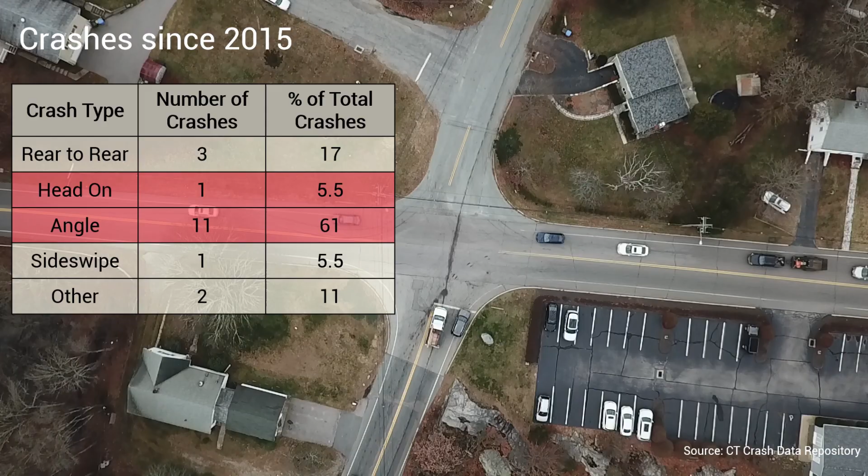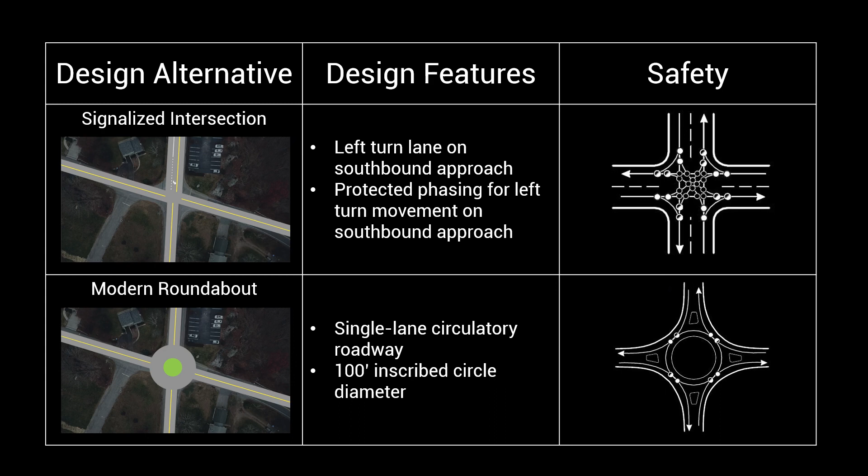Two design alternatives were considered for this intersection: a signalized intersection with a protected left turn on the southbound approach of New London Turnpike, and a single-lane modern roundabout. Roundabouts are categorically safer than traditional four-legged intersections because they entirely eliminate potential conflict points for crossing collisions.

The traffic operational performance of the design alternatives was evaluated using VISSIM models and the Highway Capacity Manual. The results indicate that at peak demand, signalization would maintain a similar level of service as the existing two-way stop control, while a roundabout would result in level of service A.

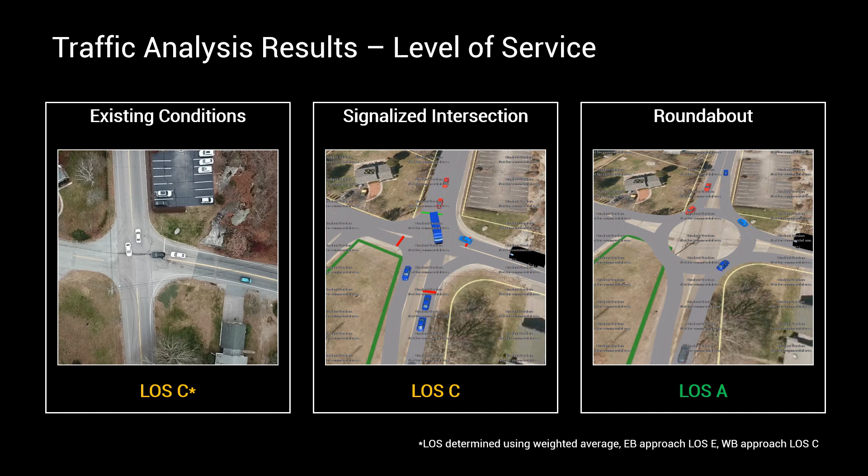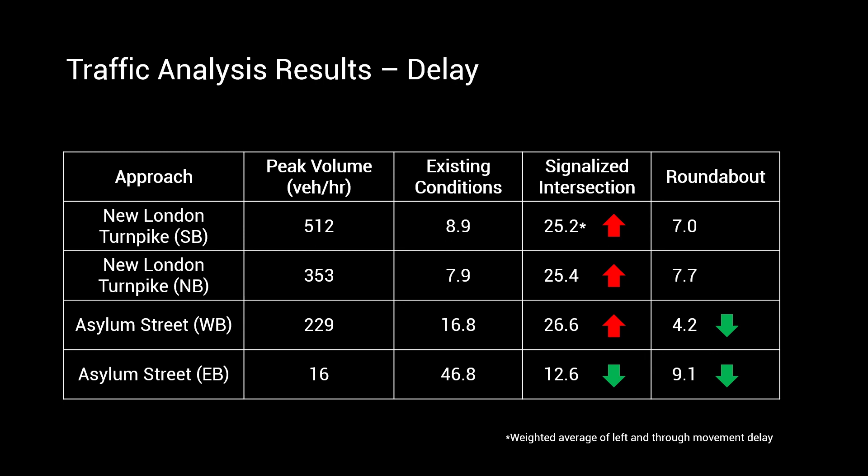As level of service only provides a broad overview of performance, delay at each approach was analyzed further to better understand these results. Despite signalization maintaining a level of service C, implementation would substantially increase delay times on the three major volume approaches to the intersection in favor of reducing delay on the eastbound approach of Asylum Street. In contrast, the implementation of the roundabout would result in very low delay times on all approaches. Due to the favorable safety characteristics and traffic performance, the modern roundabout was chosen as the primary design alternative.

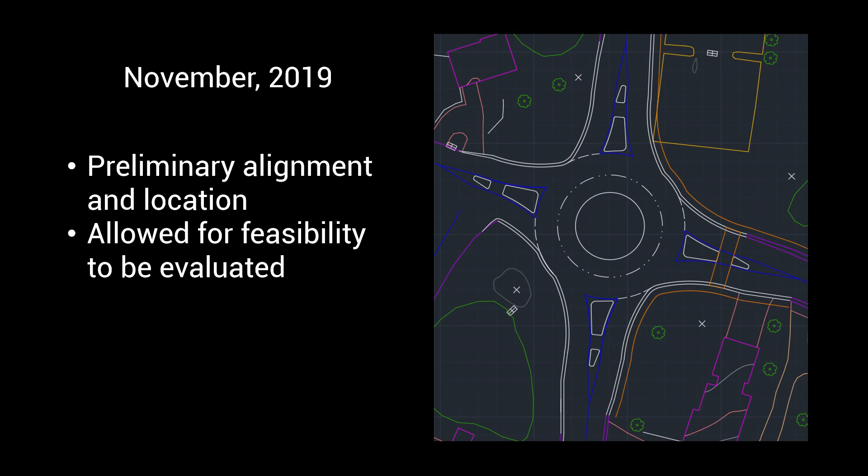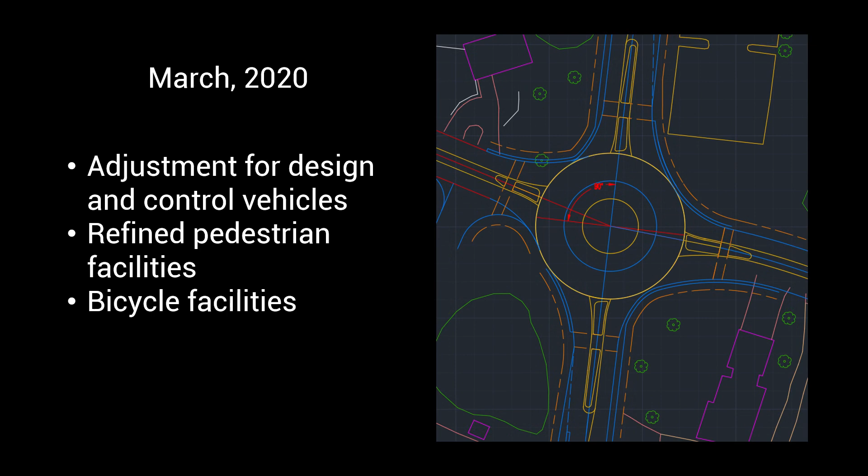The design process was iterative and was done in accordance with the Federal Highway Administration's design guidance. This process allowed for encroachment onto private property to be minimized while allocating sufficient space for vulnerable user facilities. These efforts resulted in the following design. The roundabout design features an inscribed circle diameter of 100 feet as it fits well within the existing right-of-way and is sufficiently large to accommodate typical traffic demand.

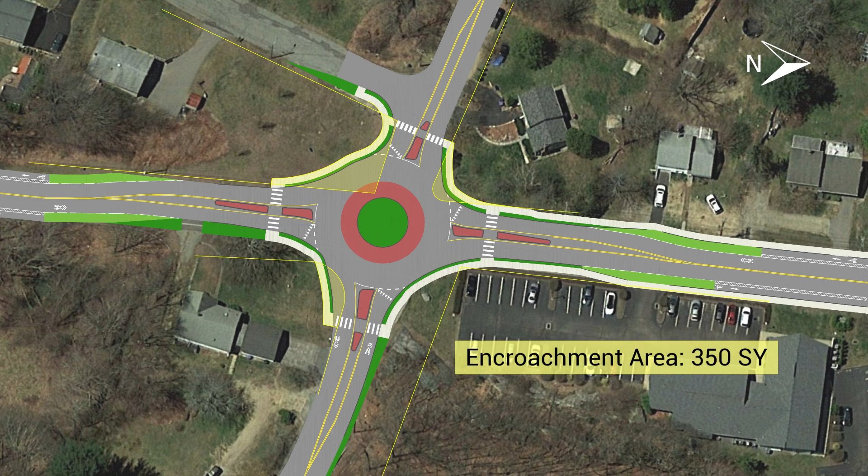Splitter islands with 6-foot wide refuge areas at crossings were provided at each approach of the intersection. In order to ensure adequate visibility and channelization without impeding access to nearby driveways, effective island length was increased with a painted envelope. The implementation of these features results in a total encroachment of 350 square yards on private property.

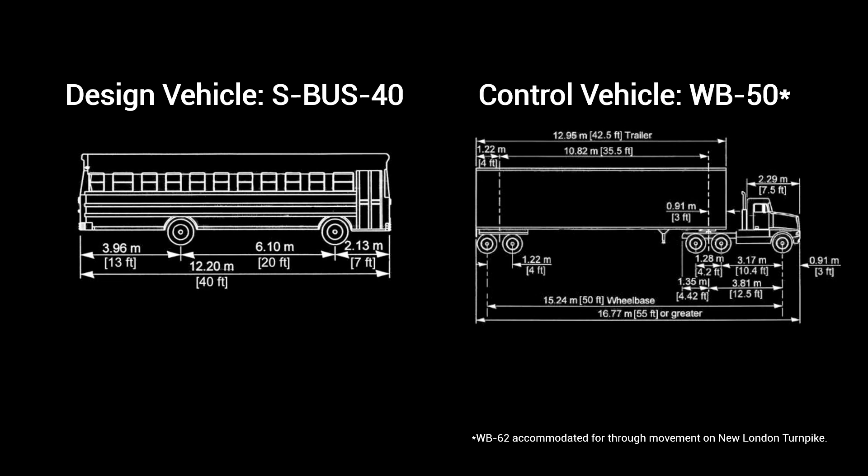A school bus was selected as the design vehicle, as it is the largest vehicle expected to make all movements at the intersection with regularity. Consequently, vehicles of lesser or equal size are able to make all movements at the intersection without using the truck apron. The major volume approaches were designed to accommodate larger vehicles as well. The WB50 truck was used as a control vehicle for all turning movements. Additionally, as New London Turnpike is a minor arterial, the WB62 truck was used as a control vehicle for north and southbound through movements.

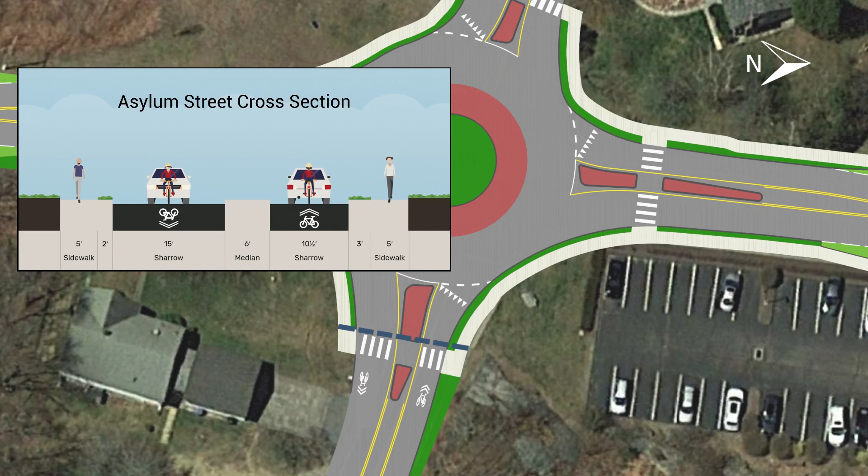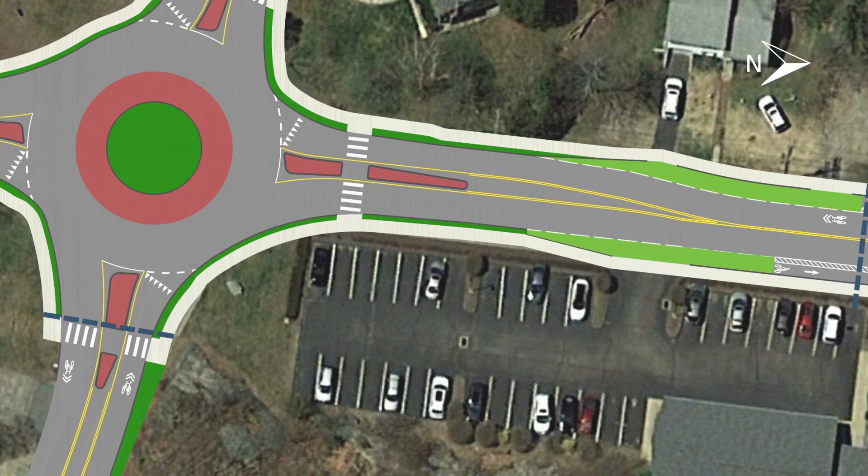An effort was also made to provide facilities for cyclists. Due to constraints imposed by the surrounding topography, it was not feasible to implement dedicated bike lanes east of the intersection. As a result, pavement markings were added to indicate to motorists that the space should be shared. On New London Turnpike, the increased right-of-way allowed for buffered bike lanes to be implemented. Cyclists using these facilities merge with traffic prior to entering the circulatory roadway. This is recommended by the Federal Highway Administration because speeds are low enough for both users to safely operate in the same space.

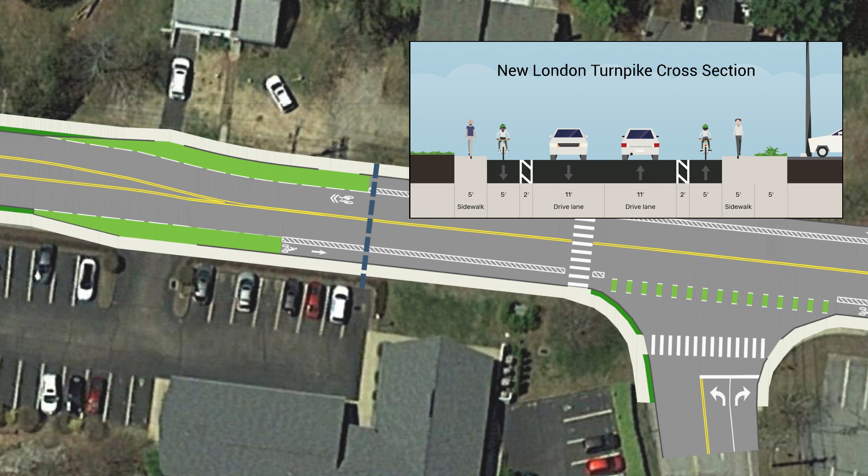For pedestrians, ADA-compliant sidewalks and crossings are provided at each approach. Our design has these facilities extended north in order to provide continuity with the existing sidewalk in the area.

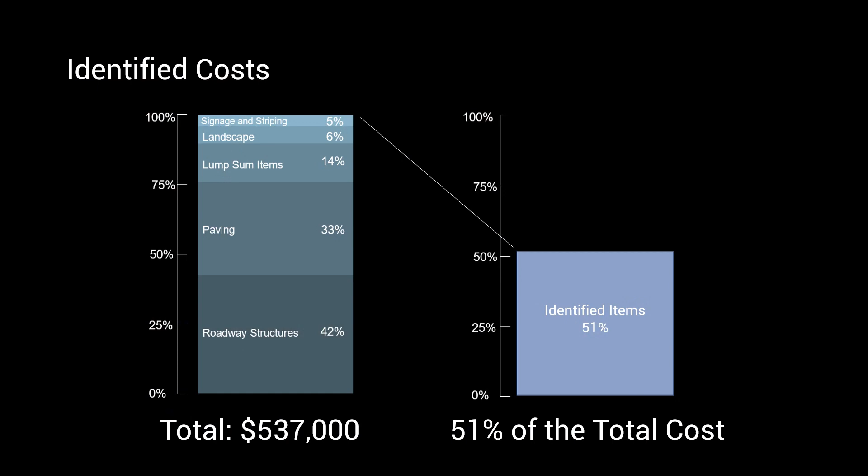We estimated the cost of the proposed roundabout by determining the quantities of major items required for our design. The subtotal of these items represents 51% of our total estimated cost. The remaining 49% of our cost consists of minor items, contingencies, and incidentals. Our minor item allowances account for items that could not yet be determined at this stage of the design, such as temporary traffic control and drainage.